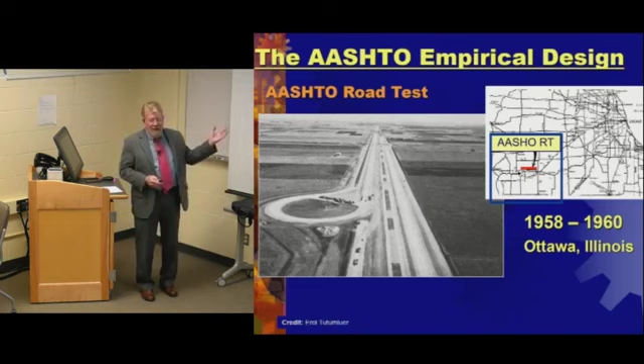I'm not going to spend a lot of time, but this is kind of what started it all back in the day, which really isn't that far from this location. Some of the issues at the time were that they used crushed limestone as a base material, just as a refresher for those who need it. It was all well graded, and most of it was about 12.5% passing the 200 sieve, which is a little bit high, especially if you have a lot of frost issues.

All the compaction was to T99, which is not the highest level of compaction you might achieve. They compared cement and bituminous treated gravels, both plant mixed, in this empirical test study. It resulted in determination of the structural coefficients for design of unbound aggregate layers of 0.14.

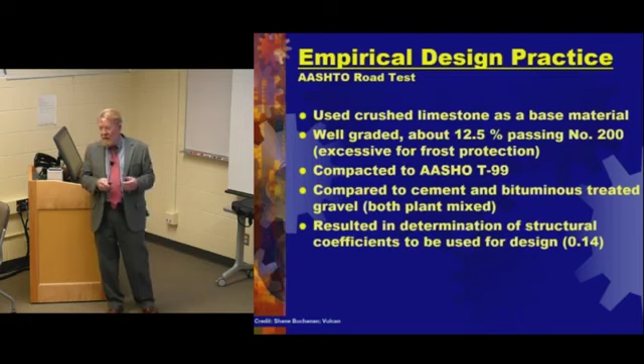And we've been doing that for many, many years. Many of the design protocols in many of the states still use the structural number methodology, even though we've advanced beyond that at this point.

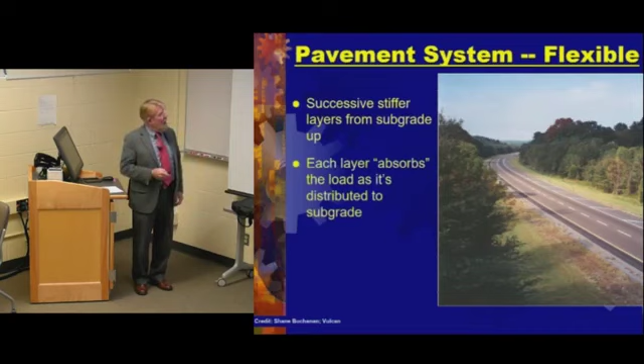So flexible pavements are really about successive stiffer layers from the subgrade to the surface. Each layer absorbs the load as it's distributed to the subgrade. And traditional design in unbound systems puts the unbound aggregate at the bottom because it's perceived to be the weakest.

Also, something you might want to consider is that when we put the unbound aggregate layer on top of the subgrade, that's the weakest spot, so we try to compact that. Sometimes you're not going to achieve even what you got in the lab with the proctor.

And so many states, at least in the state of Virginia, require you to do field testing and a control strip to see what you could actually achieve in the field based on the subgrade that was there. So we may not actually have as strong or as dense a base as we'd like to have, because we're placing it on top of the subgrade.

Of course, then we have rigid pavements, concrete. This is a section on 288 in Virginia.

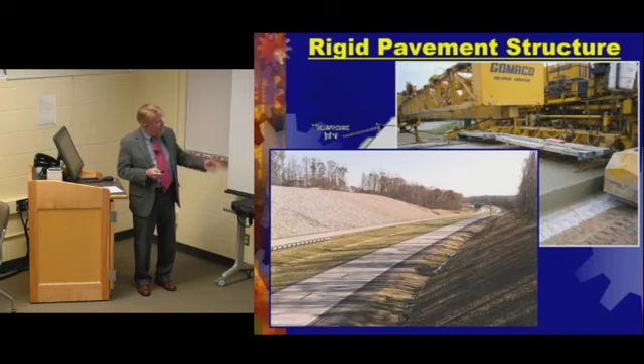And also, in order to accomplish this and do these designs, you have to characterize the materials to begin with. I'm sure many of you probably run this test, finding the resilient modulus for materials.

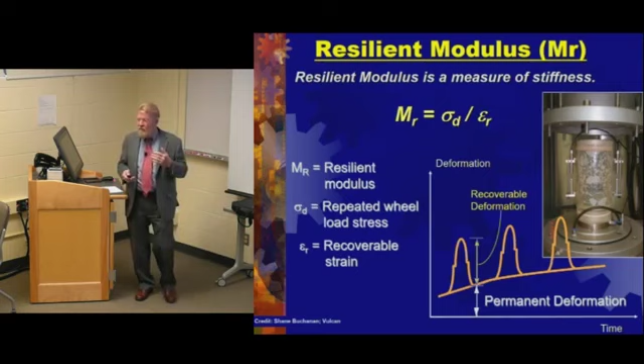But we also know that this, I'm going to go out on a limb here, may not be the best number to use or information to really build a pavement structure around when you look at unbound aggregate base. And thus some of the issues that we potentially have with MEPDG that's out there now and the research being done on it.

So one of the things that's unique about the unbound aggregate base is the stress dependency, so that the more you stress it, the stronger it becomes. And sometimes I think the general construction world doesn't understand that.

When we built the inverted section at Bull Run, the contractor that I was trying to get over 105% of proctor for T180 said, 'You can't do that, I can't do that.' And I said, 'Yeah, you'll be able to do that.' He said, 'No, I'm not going to be able to do that,' because he never had been able to do that before.

Because he's always been compacting the aggregate base on top of the subgrade. But when you start compacting - this is the key for me, if you don't walk away with anything else today, the key is that you're compacting this unbound layer, which gets stronger as you stress it, on top of a rigid platform. And when you compact it against that rigid platform of cement-treated aggregate base, you can achieve significantly higher densities and strength than you would normally get. And that's why this system works.

When I first went to work, the asphalt industry got me aside and said, 'Randy, we don't ever hear you talk about sandwich pavements.' I go, 'Okay, what are those?' He goes, 'Well, you put an aggregate base in the middle. They don't work. We have all the testing. Here's all the reports that say it doesn't work.' I go, 'Okay.' So then I bounced along for 15 years believing that.

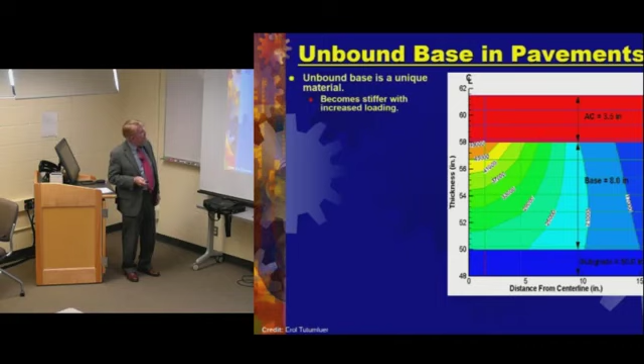So the unbound base and pavements, it's a unique material. It becomes stronger as you stress it more. It's flexible and it can be optimized. It's best captured when placed near the surface, rather than down deep in the structure, because that's where the stresses are going to occur. And with inverted pavements, the stress state can be 3 to 5 times more than what you would normally find in conventional flexible pavements.

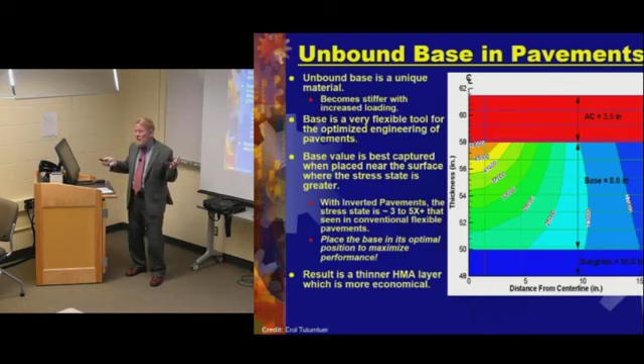So you want to place the base where its optimal location is, and then you can use a thinner HMA layer over the surface. I think from a design engineer's point of view, we've so long been in the design community where we just naturally talk about flexible pavements, thick layers of asphalt, or rigid concrete pavements. But we've never really been educated significantly on what this inverted pavement is and how it works and whether it can work. So I think many pavement design engineers up to this point have been indoctrinated into two systems and don't really think openly about other opportunities. Maybe there'll be new concepts coming along in the future as well, but for right now, we want to talk about inverted pavements.

Density is critical. Density is really the same as stiffness, but you have to achieve the density in order to get the stiffness, because that's really what you're looking for.

South Africa specifies 86% of apparent specific gravity. So basically what that means is if you take a specific gravity of a material that's 3, times 62.4 pounds per cubic foot of water, you're talking about 180 some pounds per cubic foot of a solid mass of stone. The South Africans are trying to achieve 86% of that, which would be about 105% of a T180 Proctor. Now, you go to any contractor here in the United States and tell him you want him to achieve 105% of T180 Proctor, and he's going to tell you to go talk to somebody else because we can't do that. So in many respects, it's just a general unawareness of what the capacity or potential of this inverted pavement design concept could be.

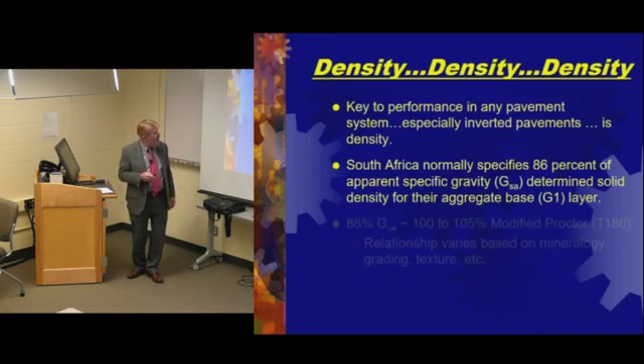86%, that can vary a little bit based on the mineralogy that you have present, whether it's a limestone, whether you have a lot of quartz in it, or other heavy metal minerals.

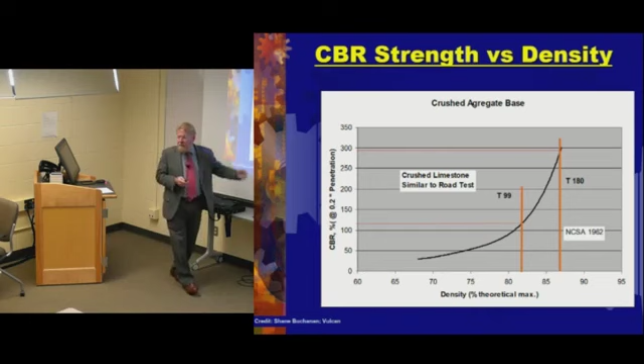So the unbound aggregate base is made easier to compact on top of a cement treated base, right? We got that, that's the key walkaway. So we've seen this, as the CBR improves, we see that we can move up the density, which gives us stronger values on this curve.

So this is what we're really talking about when we talk about an inverted pavement: thin HMA, 6 to 8 inches of unbound aggregate base, compacted on top of a cement treated base, around 4% or less, depending upon what strengths you're looking for, over a subgrade. So let's look at some of the key points just to review.

So you have a relatively thin HMA layer on the surface. Usually it can be a 9.5 millimeter. It doesn't have to be heavy, doesn't have to be intermediate. A small matrix, or a nominal maximum size, can be like a 4.75. And then you can just mill the surface off and replace it every 8 to 10 years whenever you need it.

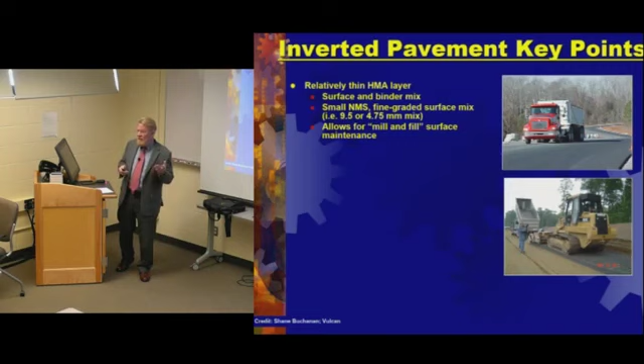You're going to have less cracking and improved fatigue life because of the lower tensile stresses at the bottom of the asphalt, since it's not a structural layer. The unbound base carries more of the loading than in a conventional flexible pavement, and 6 to 8 inches is the optimal thickness we've found. You look for, like I said, a minimum of 100% Proctor on it.

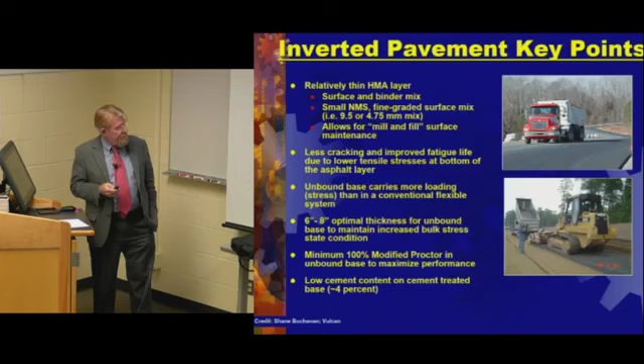So let's talk about South Africa for a minute and some of their protocols there, which if I hadn't been exposed to some of their work, I probably wouldn't have pursued it as much. But when an entire country finds a pavement design that works well for them, to me it has to have some merit and validity. And why would we not want to embrace that concept, go learn about it, study it, and see whether it has validity where we are?

But are there a lot of people out there running to discover what this pavement structure is like? No. And why is that? That's a political question, and I won't go there right now.

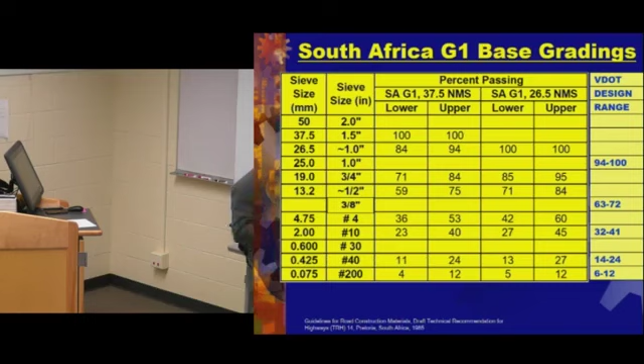So we see some of their gradings - this is the VDOT design range in terms of what they put on their unbound aggregate bases. But we see they're very similar to what we have in the G1 range.

These are a couple of important concepts, and I'm going to read them. It's important to note that for design purposes, the surfacing is not considered to add any structural value to the pavement. This is why the asphalt industry is not real keen on me.

In the calculation of the life cycle cost of these pavements, particular attention should be paid to preventative surface maintenance. The other is, in South Africa, we typically do not assume that the HMA layer will provide any structural life to the pavement. We typically use relatively thin AC layers and design the remainder of the structure to carry the loads. When the surfacing deteriorates, we mill it off and overlay it. We often overlay with seal or thin AC as part of the normal maintenance procedures.

So I can't really show this slide to most of the asphalt community because they usually walk out.

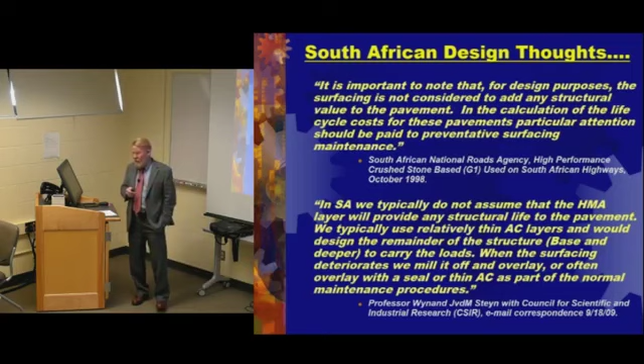So let's talk about their design protocols. I found this interesting. Pavements with high quality crushed stone are capable of accommodating traffic demands up to 50 million standard axles.

The optimum thickness for the G1 base is basically 6 inches. If a pavement with a crushed stone base is maintained with resurfacings at appropriate intervals, the pavement can provide service for an indefinite time. It sounds like...

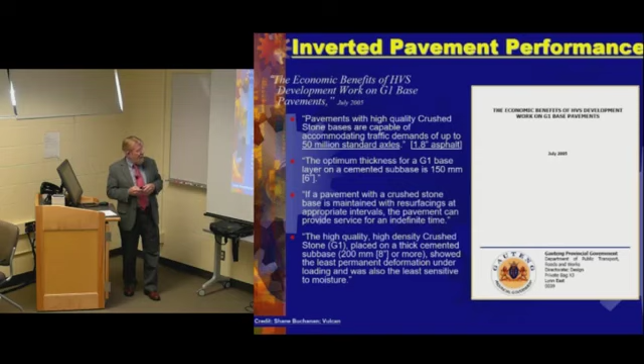Perpetual pavements, sort of - I think somebody else said that though. And the high quality, high density crushed stone placed on a thick cemented subbase showed the least permanent deformation under loading and was also the least sensitive to moisture. So these sound like some pretty compelling arguments.

They've utilized mechanistic empirical design since the mid-70s, actually. We're just starting to get there with our new MEPDG design guide.

And the transfer functions that relate strain and stress to field cracking are critical in understanding how this structure works. Different transfer functions are used when you have thinner asphalt layers. So the existing transfer functions that might be out there for flexible pavements aren't necessarily going to work for these inverted concepts. We have to be careful because we're using an older system to predict something new.

This is the South African version of your ATLAS. So they drive this baby out there - they don't have to crawl out there. Apparently they can take it out to a road. What I like about this is that they can drive it to a road they've built and then test the road in place. I think that'd be a great QA, QC control for the contractor, you know?

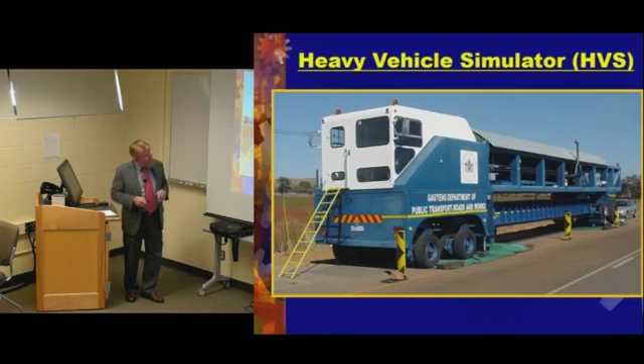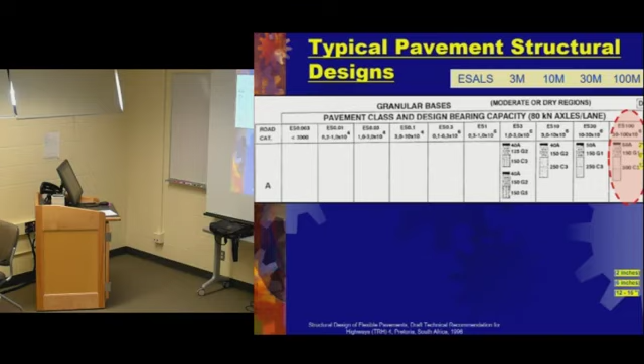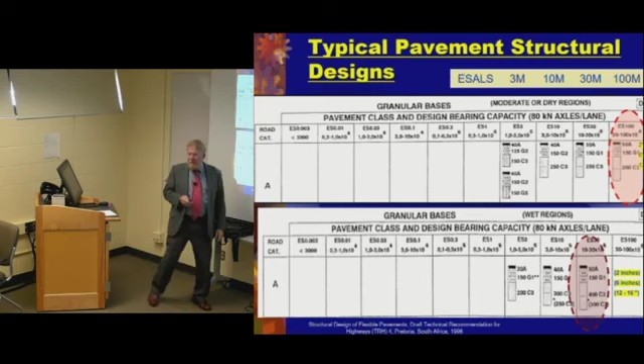And here is their highest level: 2 inches of asphalt, 6 inches of unbound aggregate base, and 12 inches of CTB. That's their primo design for up to 100 million axles. That's for dry areas, and then here's the wet regions - a little bit different, a little bit more cement treated base at the bottom.

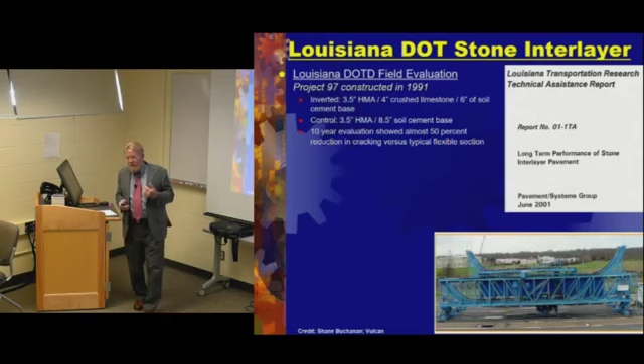So these are some of the things that we've discovered since. Louisiana discovered that they were having issues with reflective cracking. So what they did is they began to put what they call an interlayer in - basically an unbound layer in the midst, which seemed to stop the reflective cracking. So they tested this for about 10 years and discovered a 50% reduction in cracking versus their normal flexible pavements.

They used an ALF to actually test several sections, and found that they carried over 4 times the normal load that an ALF would. So they adopted the stone interlayer base course as a design standard option on the projects, and they've completed 54 projects. This is in 2003, so there's probably more since then. So they found that this does work as far as using this interlayer concept.

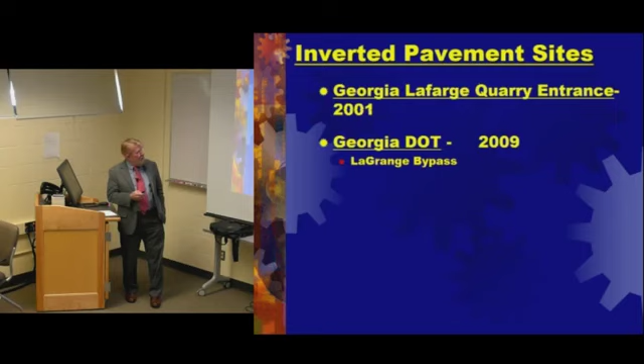So let's talk about some of the test sections that have been built in the United States. In 2001, we built this Lafarge quarry entrance, and the Georgia DOT in 2009 built a section in LaGrange bypass. In 2011, Capstone built a section at their Bull Run plant in Northern Virginia. And in 2012, Bryce Simons built with the New Mexico DOT a section on Raton Pass, which is some of the highest we have. Then in 2015, Vulcan Materials built a quarry road at their quarry in Pineville, North Carolina.

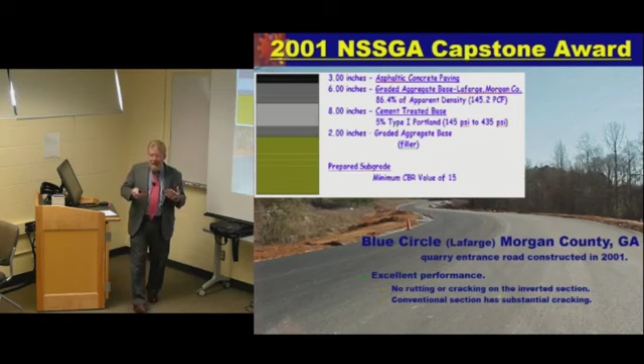Since 2001, we've had good rutting performance, no rutting, no cracking on the inverted section. Although the traditional section has encountered some cracking at the entrance where the trucks are coming in and out of the quarry, the normal pavement structure. We can see they used from 14 to 18 on the standard DOT method in Georgia in terms of how they compacted it. And then also the 10 to 14, they wanted to try the slushing technique, which Errol tells me you've seen one of the videos from South Africa about how that works.

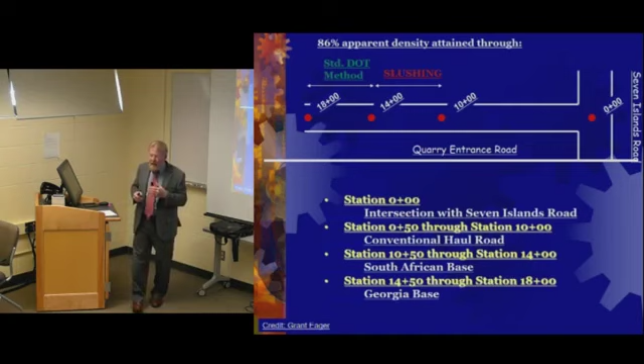I think it's really kind of cool, because if you've watched a paving job where you're actually compacting it, you can see the water bubbles and fines come up from the structure. The guy from South Africa did a talk at TRB a couple of years ago, and he said you can tell when it's really good. You can take a hammer out there after it's done and hit it, and it'll ping like you're hitting a piece of steel. Then you know you got it right. He's been building these roads for some time and swears that the slushing technique provides that last little bit of interlock that gives you the ultimate strength we're really looking for. But we haven't really tried it significantly in the United States, except in this location.

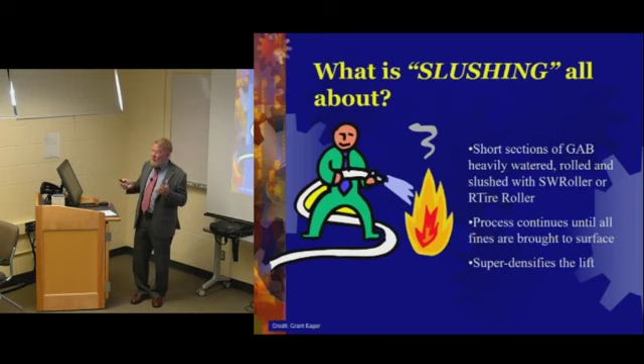So this was the section that we built. Most of you have seen the video, so you know how it works. You actually compact it first and get it pretty tight as far as your normal compaction. In the U.S., we'd probably quit then and move on. But there's one extra step, the slushing, where you flood the surface and do high frequency, low amplitude passes with a vibratory roller, which begins to vibrate all those fines up out of the structure. Then you remove all the superfines, and you end up with a real hard layer at the bottom.

So as of 2009, which is a while ago, we've had 1.1 million ESALs. I would like to figure out how to update this, but I don't know anybody that's there any longer. And no shrink cracking was noticed.

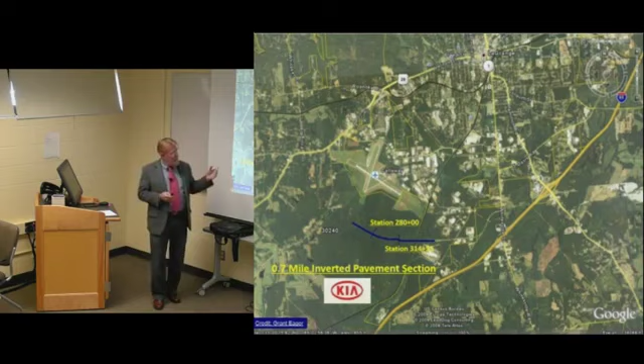So we move on to LaGrange bypass now. This is the Georgia DOT, built right in here. It's like 7/10 of a mile. It was on an originally intended concrete pavement, 9.5 inches of Portland cement, 10 inches of graded aggregate base, and then the subgrade. So they built this inverted section with 1.5 inches, 3.5 inches of asphalt, 6 inches of unbound, and 10 inches of cement treated.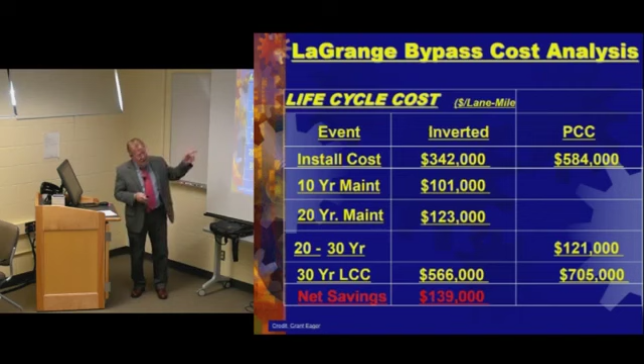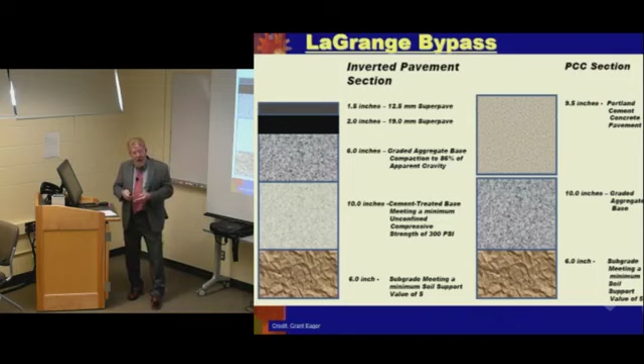We were concerned about it when they first built it because it was a turning spot for trucks, as trucks were turning off of this layer. And we were concerned because of the thin asphalt, 3.5 inches, that we might have some skidding from the tire tracks pushing it and pushing it up. But so far, I'm not aware of that having happened on this particular section.

So the one I'm most familiar with is the one that Capstone built in Northern Virginia. This is the quarry here. Some of the students were asking me before how long a quarry might last. This particular quarry, we're expanding it out to here. We expect this quarry to last about 100 years. And when it's finished, at 400 feet deep, the bottom will be 15 acres, large.

So you can see it's a very large infrastructure. And for Capstone, which is the company that owns this quarry at Bull Run, you can see where we've cleared the pathway for the new bypass. Some of the things that I really wanted to do, because as part of ICAR, we invested a lot of money in research in unbound aggregate base.

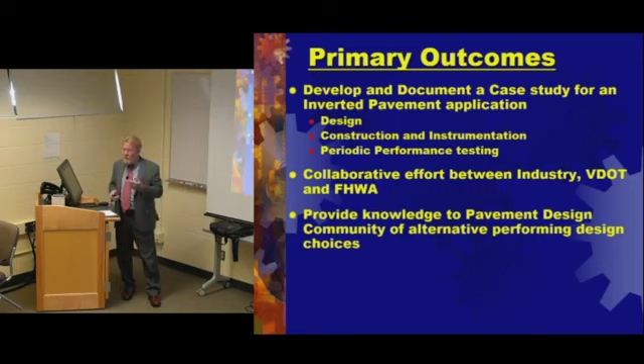And some of that was... I wanted the opportunity to use some of that knowledge. So for this one, we thought, well, we could do the design. If we could build it and have somebody instrument it, and then we could performance test it as time goes on, would be great. And actually, it turned out to be a good collaborative effort because Federal Highway came in, and they're actually the ones that instrumented it for us. And the DOT, Virginia DOT, was involved from a standpoint of being aware of what was going on and helping us troubleshoot some of the areas when we needed to.

So this predictive aspect of ICAR is what we wanted to use. So when we designed the inverted base at Bull Run, we characterized the materials using the design equations that we developed in ICAR protocols.

Reza Ashtiani is the one that did the design on this for us. He's currently... let's see, I got to get this right. There's a difference between associate and assistant. I think he's an associate professor now at the University of Texas, El Paso.

So he's still connected and still involved, but also I think the current MEPDG, as I understand it, still looks at pavement design from an isotropic point of view. It's vertical stresses, and because a lot of the work that Errol has done over the years, we know that that's not necessarily the case, and it's really an anisotropic environment because we do have horizontal stresses as well. So, especially with the moving wheel loads, which...

Errol's the first guy I heard that about from, and that was probably 15 years ago. I thought that makes sense. We're looking at a dynamic system, not a static system. So I felt like we had improved upon the entire knowledge base of what was really going on.

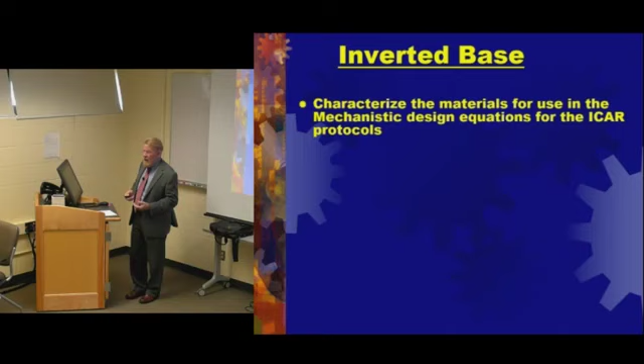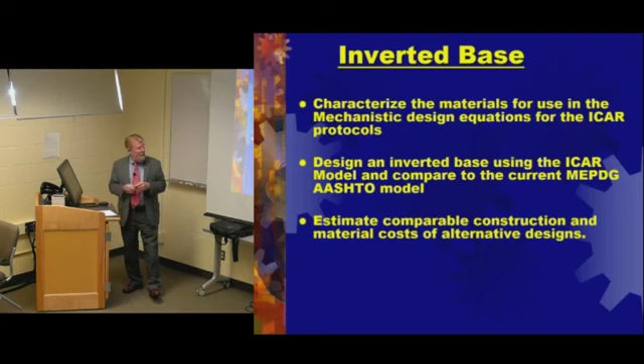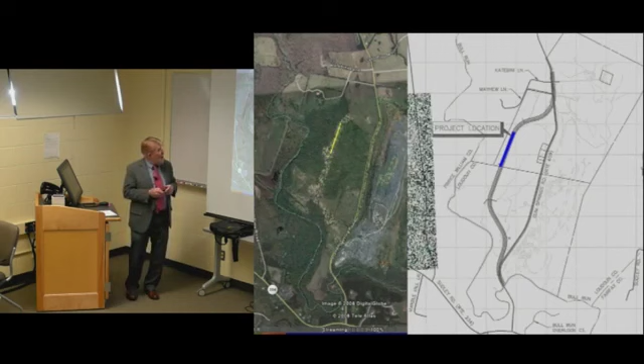And that's what it looks like after we cleared all the woods out of the way. So this is the pavement at the original section, the inverted. Now you see that we have like 5 inches of asphalt on this, which is a little bit more than we wanted. We were really just hoping to put like 2 inches on it, but none of us were brave enough to go that distance.

I think that we'd like to have some more sections and try less asphalt. But that's what we came up with, because we're using some old models to predict fatigue life, and we're using old models, asphalt models, to predict rutting. And those models may not be appropriate to this design protocol, so we kind of mixed two different worlds together. But this, you can see this standard design, and then the cement treated, unbound, and the 5 inches of AC.

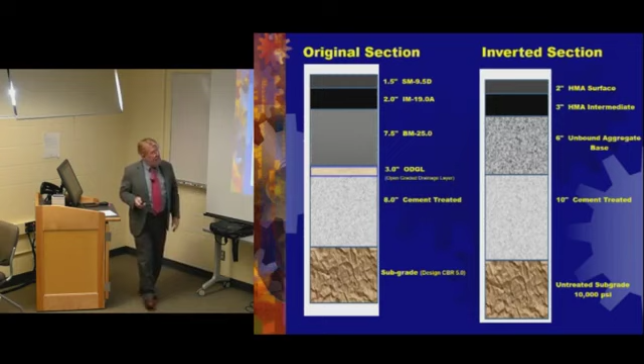So it was a great experimental section. We picked is level, it was straight, no curves, and it was all in cut. So what we have below us, as a matter of fact, the FWD work that we did there, it was really difficult to interpret it because there was just rock below us. 6 inches below the bottom was rock. So it was difficult to understand what was really going on with some of the FWD work.

So we had a 400-foot section of inverted design, and then we buried, Federal Highway buried the instruments in the test section here. And this was the inverted design, and then we had the control section with the existing pavement design and the instrumentation location. So we buried the same instruments in both spots. And in the middle, we had a traffic monitoring system. So we still are operating that traffic monitoring system today.

Although the sensors in the road, the embedded sensors, are starting to wear, and we're going to have to make a decision whether we're going to revamp it or whether we're going to just drop it. I would like to keep it going for at least 10 years, so we have 10 years worth of data.

Also, because this is not a private road, this is the DOT owns this road. So we had to take an existing road and condemn it so we could own it, and then give them all this land and pave it all for them and build the whole thing on their behalf because it's a public road. So because we're trying an innovative design, we had to warranty this. The company had to warranty this design, said if it fails within 10 years, then we have to go back and replace it or put in what the original design was.

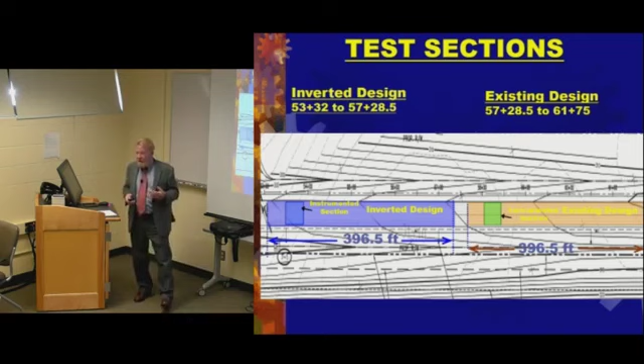So those are some of the issues that we had to deal with at the time. Fortunately, I didn't get a bunch of lawyers involved with it, so it was pretty simple.

So that's kind of what we did, and we used the ICAR protocols, which I think were really important.

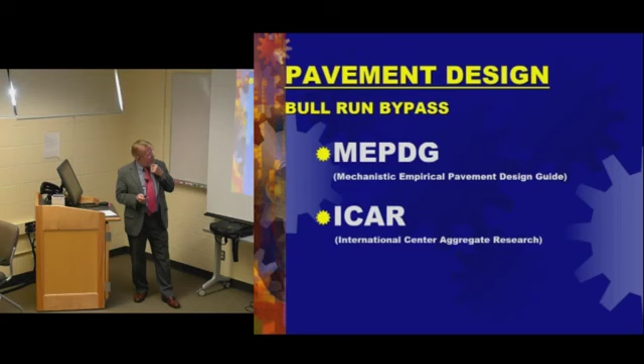And I think what's really critical is this data here. If you use the linear isotropic, you discover that you have the existing models, you discover that you have tension in the base layers, and so how can you have tension there? Whereas using the anisotropic, look, we still have some small amounts of compression, which is what we would normally expect to see. This is what you pavement design engineers tell me, because this is relatively foreign to me as a good old mining engineer.

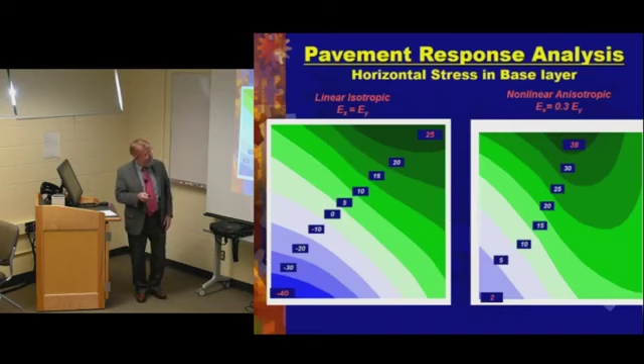So then we did the traffic calculations to determine how many ESALs does this thing need to survive. We wanted to go 30 years, 17 million ESALs is what the design is.

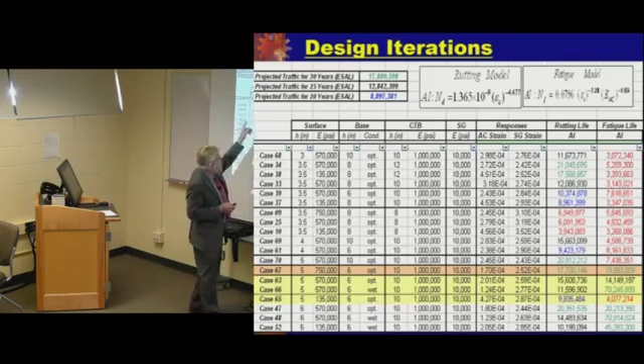This is all Reza's work. And then he did like 70 iterations of linear programming, and we finally, the only one that came out green, because remember, we're using these fatigue models and rutting models that are asphalt related. Whether they're applicable to this design protocol, I would question that, right?

So anyway, this is, we had nothing better. So it's just, okay, when we hit the green lines, that said, okay, we're past 17 million on both rutting, it should last that long, and we needed to have this design, which was 5 inches of aggregate, 5 inches of pavement, asphalt, and then 6 inches of unbound aggregate, 10 inches of CTA on a 10,000 PSI subgrade.

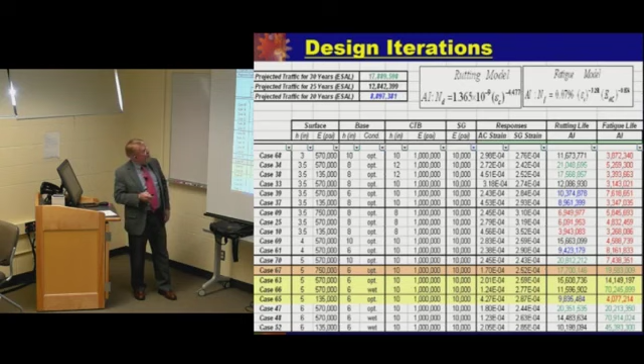So those are the design protocols using the models that we developed. The nice thing was that we instrumented, and I just told you, 2 different ways for both the pavement instrumentation and in the traffic.

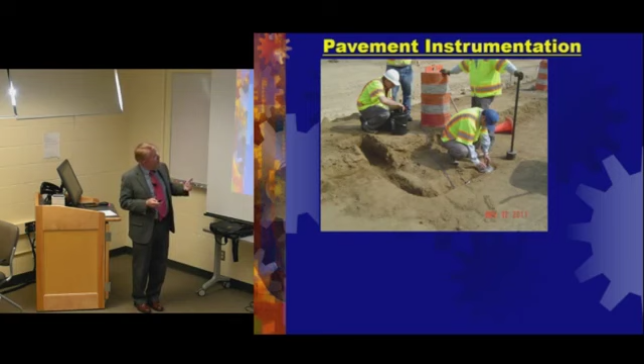So I wish Ahmad would have been here when we put all these in, because he probably would have made sure that they were done right. But we put them in anyway.

So the Federal Highway, I really do appreciate their work in this area. It was a godsend for me and the company, because they invested a lot of time and energy, and it's something that we know nothing about from the private sector point of view.

So we installed all the equipment, the strain gauges, the traffic, and at the end of the day, what was the cost?

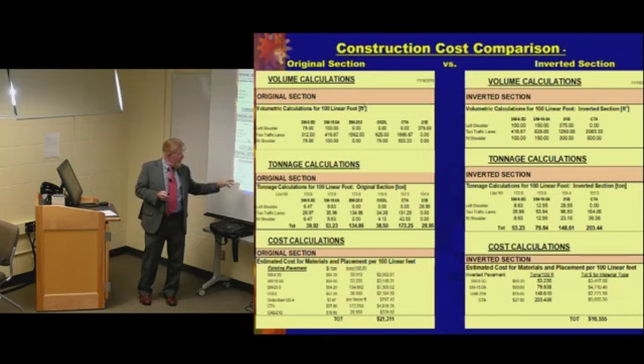So if you add all this up, these are all the calculations of all the costs for everything per 100 foot. The original section would be $21,000 per 100 foot. The inverted section was $16,000 per 100 foot. So basically you end up with like a 22% savings going from the design protocol that was there to the inverted.

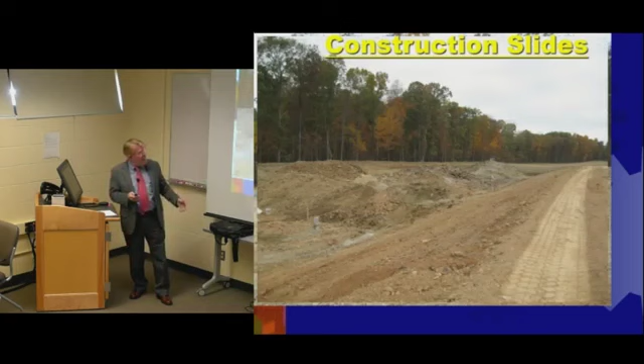These are some construction slides. We had to drill and blast, right? So drilling, blasting. And then we had to dig it all out to get down to the grade. So this is a straight section. It was all uncut, so it was all very consistent. Notice some of the nice sized chunks of rocks that came out of there to rip it up.

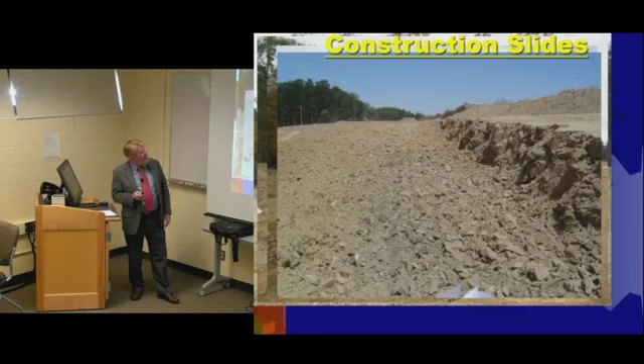This is the section where the inverted is. You can see the 2 zones there where we buried the instruments. We actually had a time-lapse camera right there, and so we kind of did a time-lapse for a lot of it.

And this is the finished product. You can see the traffic solar panel there, and then this blue box is what hooked into the instrumentation and the pavement itself.

What was cool is because we were building this, we had a demonstration project and invited everybody to come and participate. We had a pretty good attendance when we had the presentation.

You might recognize some of the participants who actually did talks that day. This is Mr. Tutumluer, and then Douglas Cortez did his PhD on inverted at Georgia Tech with Dr. Cardoza, and Nelson Gibson, who was with the Federal Highway, did all the instrumentation on our behalf. Then Reza is the one that did all the design work. And Shane Buchanan was with Vulcan at the time and has been involved in inverted quite a bit, but he moved over to Oldcastle now, so he may not be as involved in inverted as he once was when he was with the Agger guys.

So this is important here, just so you begin to get a grip. If we look at the solid particle density, if you had a solid mass of rock at 2.9 specific gravity, you're going to get 181.7 pounds per cubic foot. That's 100% density, right? So if you look at 86% density of that, which is what the South Africans attempt to get, it's 156.2 pounds per cubic foot. This material is called diabase, so it's one of the best construction stones for pavements probably in existence. It's very homogeneous, very consistent in terms of what it is.

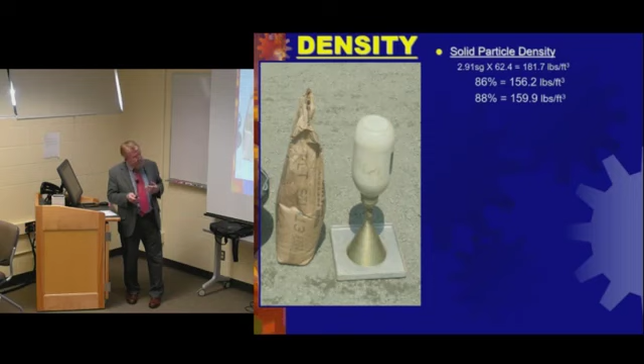So the modified Proctor that we got, the T180, was 151 pounds per cubic foot. So the northbound lane, these are some of the densities that we actually achieved. We got 161.7 pounds per cubic foot, or 88.9% of the maximum density, or 106 of T180. Now, who would have thought that you could get that kind of densities in construction?

The center lane, not as good, but still pretty good. And then the southbound lane. So, for the most part, at least in those three locations, we did achieve getting those high densities that we know is critical to the success of this design. We did not slush it, though. I wanted to take 100 foot and try it, but we just didn't.

So these are some of the activities that we did, you can see the LV going in. It was nice at the demonstration because we had all the instrumentation out so people could see it. We had it kind of profiled so you could see where it was actually going in the pavement structure. So it was kind of cool in that respect.

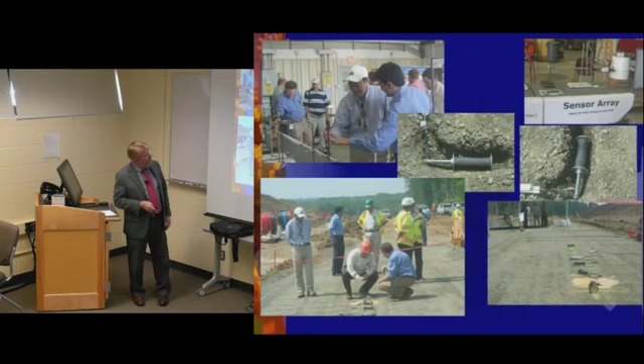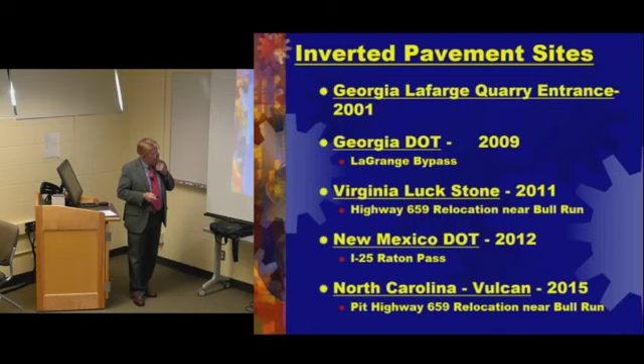So, these again, just to recover. Virginia. Let's talk about New Mexico.

I don't have a lot of data on New Mexico except the design. It was in Raton Pass, Interstate 25, 1.6 miles. They get 54 inches of snow per year. We thought this would be a great test to see how well it performs. And it was built in 2012, using 3 inches of HMA, 8 inches of aggregate base, and 10 inches cement treated.

Bryce Simons is the one that was responsible really for getting this through the New Mexico Department of Transportation. He's since retired. And he did come back to do an inverted section that we had at TRB a couple of years ago. But I don't know how this is performing, but I haven't heard anything bad about it yet. Do you know anything, Earl? Have you heard anything about this section?

Not really. That's okay, what I'd like to follow up, actually. Okay.

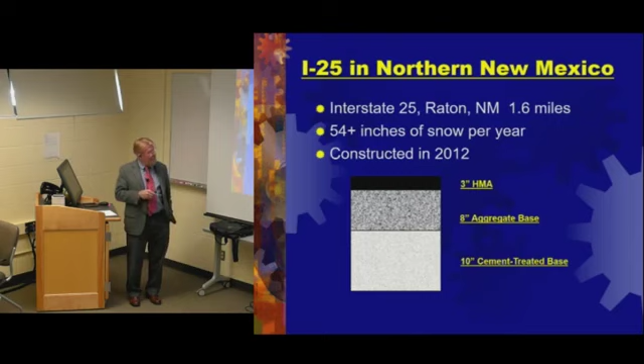Now this is the new one that was built recently. This one you might not have heard about too much. I know Kevin hasn't. If Kevin came, this is probably what he'd talk about.

Vulcan needed to relocate a road near their quarry in Charlotte, North Carolina.

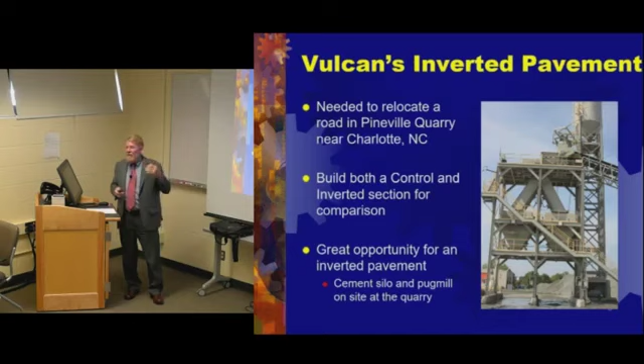So they had, it's nice because they built a control section and an inverted section on this new road they were putting in. And they also had a pugmill capable of cement treated aggregate. Not all aggregate producers had this capacity at each quarry. So that was all good that aligned.

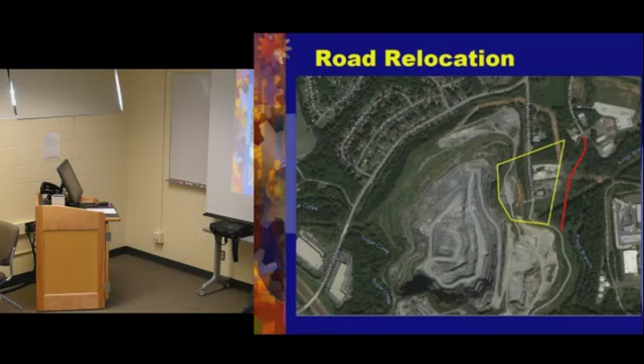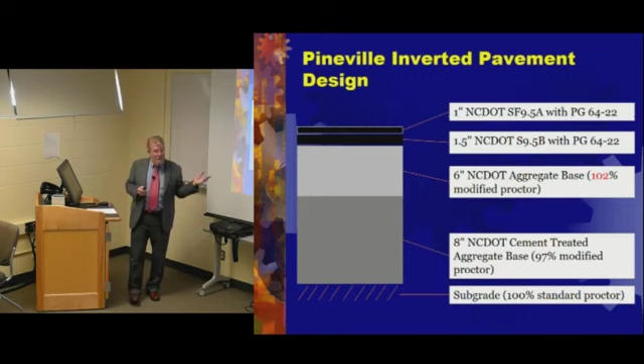So they're estimating 1.5 to 2 million ESALs over that 20-year span. And they used the South African protocol as a concept to design around. So they ended up with 1 inch. These are North Carolina standard mixes, with the intermediate of 1.5 inches. So we had a total of 2.5 inches of asphalt, 6 inches of aggregate base, and then 8 inches of cement treated.

And they were trying to achieve the 8 inches at 97% modified. They're trying to get at least that dense when they put it in.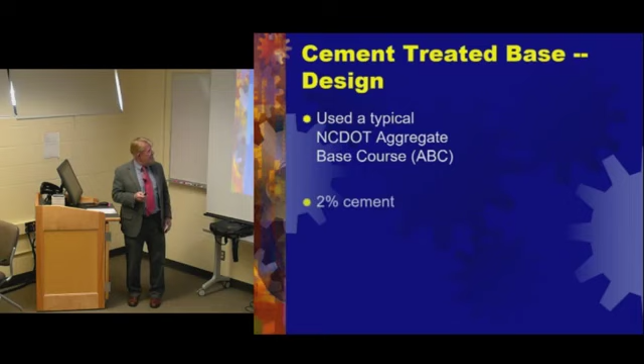They weren't doing anything special. This is the standard ABC aggregate base course for North Carolina and standard grading, with only 2% cement. And they were looking for a compressive strength of 550 psi at 7 days.

This is design. Marshall's scrunching his face back there. 2% won't get you 550, will it? It depends on the quarry. Oh yeah, it does. This Pineville quarry is an igneous, pretty tough stone there.

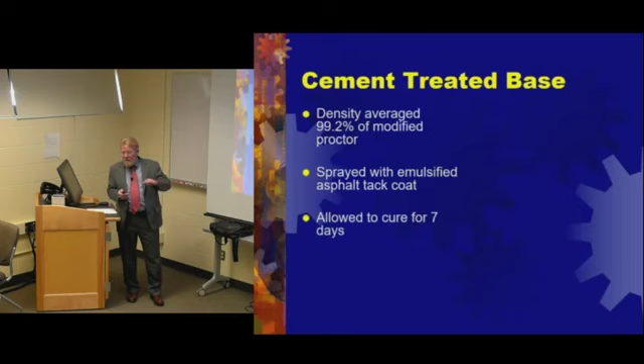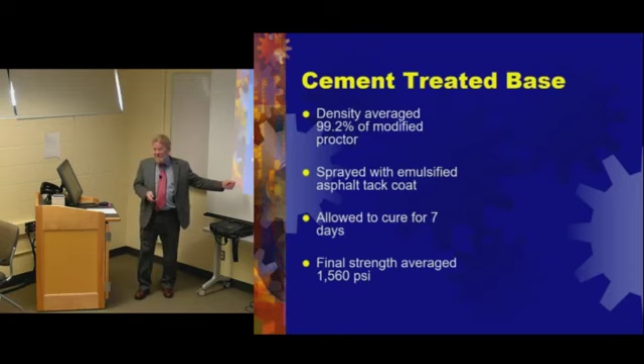But Kevin says that he couldn't control the cement sometimes, and it would go a little crazy. Sometimes we have a little trouble with that. And usually they figure if they kind of, anyway, we got a little bit higher than 2% on average, he said. So our average final strengths were 1,500 psi, which is pretty up there. And it'll be interesting to see if we crack it.

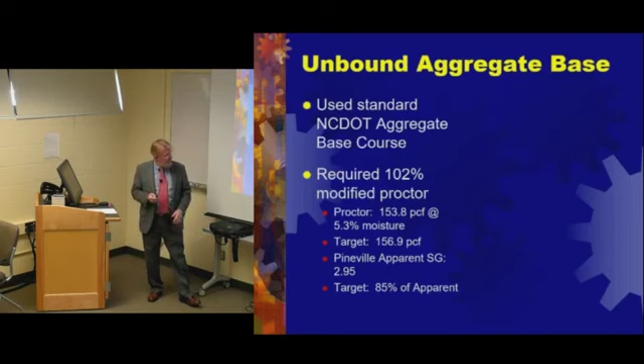So that actually you can see where they cured it and let it sit for 7 days. So this was the Proctor, 153 pounds. They're looking for 102%, their target was this. Their specific gravity, this material is pretty high as well. And they were trying to get 85% of the apparent specific gravity.

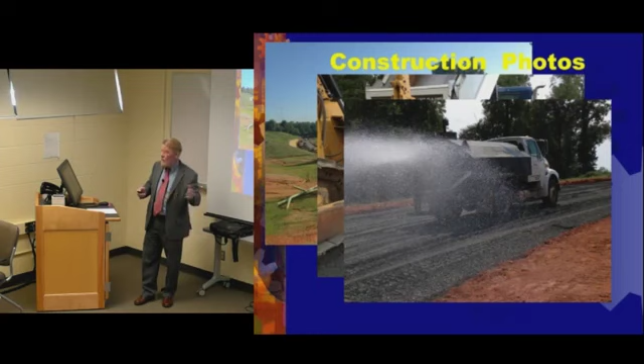Slushing - they didn't slush it, they just, North Carolina kind of does, they get it really wet. They put it down kind of dry, and then they run water trucks over it and get it pretty wet, and then they compact it.

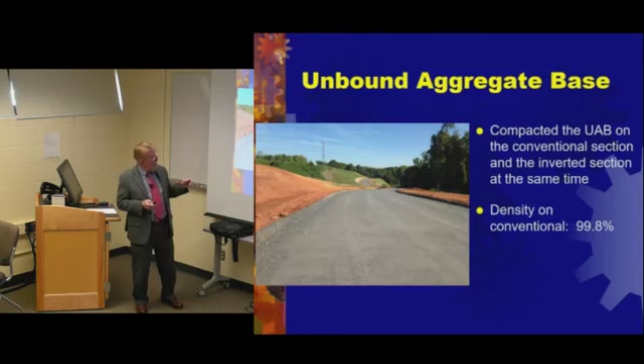And they did it on both sections at the same time, and the roller driver who was doing the compaction work said that when he did the unbound aggregate it would bounce. He could tell that it was different because it was bouncing a lot more.

So they got 99 on the conventional pavement, and what he was looking for 102, he got 103 on the inverted section on the unbound aggregate base. So he achieved that as well.

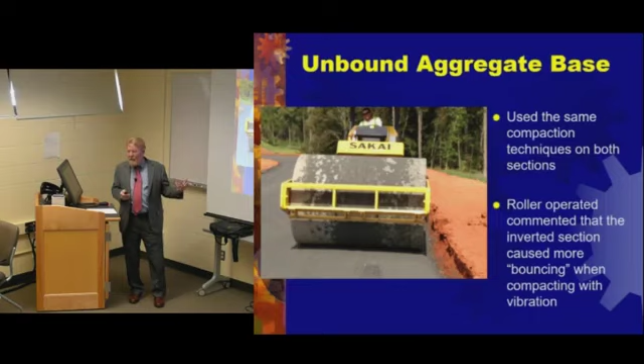And they didn't change the methodology, and this is where the operator reported that he could tell there was a difference because it was bouncing. So he had something, a platform to really compact against. And their normal DOT mix - so it achieved better density on all layers on the inverted pavement than they expected, and the importance of a good foundation.

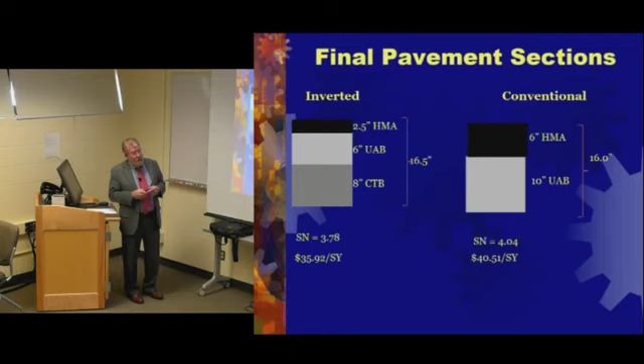So this is the conventional that they used, and the unbound, the inverted. This was $35 a square yard versus $40 a square yard, 11% less in cost.

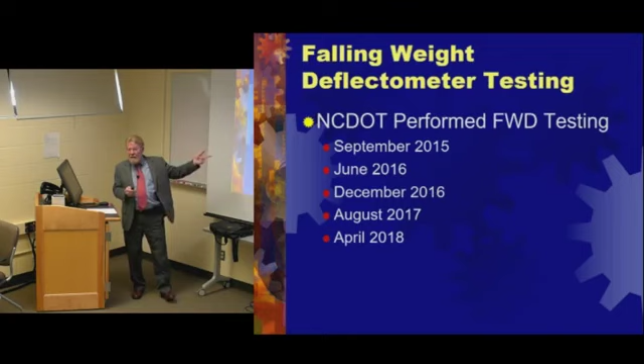What's cool about this is now they've gone in with the FWD 5 different times over the time it was built, September 2015 to April 2018, and done FWD work along the entire length of the road. And then we're going to look at those results.

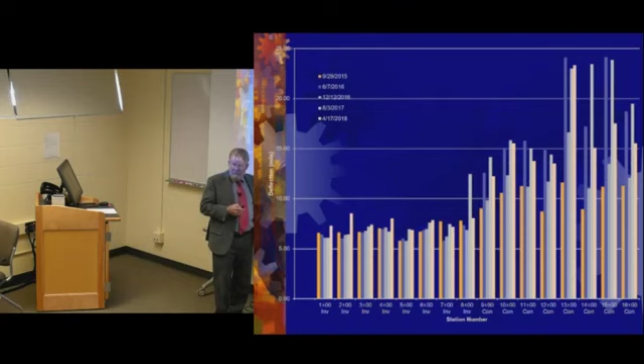So this is the inverted section, and this is the standard section. You see any difference? So the deflection was about 15 mils on the standard section and 7 on the inverted section in terms of deflection.

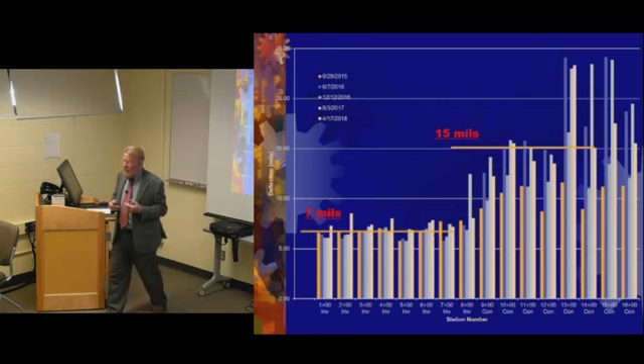So we can see that something might be going on here. There might be some benefit, and obviously the key to the inverted, again, is the unbound layer being stressed to the max, maximum hyper density. And I think if we slush these sections, we'd probably even get a denser structure that would be able to sustain the level of traffic South Africa has for those many years.

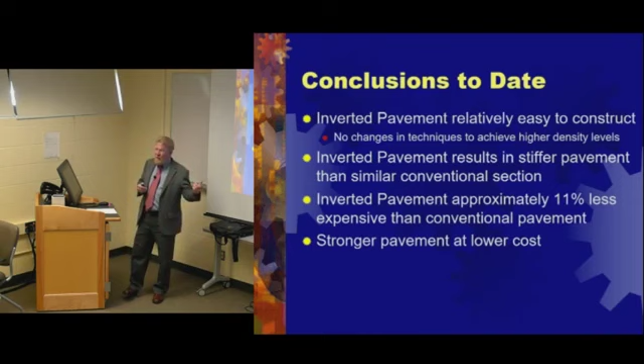So it's relatively easy to construct. No new or high level techniques - it's standard techniques that people are used to. It's stiffer, and it's 11% less costly for them when they built this section. So you're getting a stronger pavement at a lower cost.

So what's the future? Well, Tennessee, we're looking and working at a 1.7 mile section of inverted. We submitted a pool fund study a couple of years ago and circulated among all the states, but we didn't get too many takers. I think they were asking, at least what I've heard back, for too much money over too long a period.

And as a result, we haven't found a DOT to help us rewrite it and send it out again as something different, so we've been trying different pathways to get a little bit more interest on a national level. TRB Aggregate Committee actually submitted a synthesis proposal to NCHRP, but we need to revamp it and resubmit it because we didn't really get any support going in that particular direction.